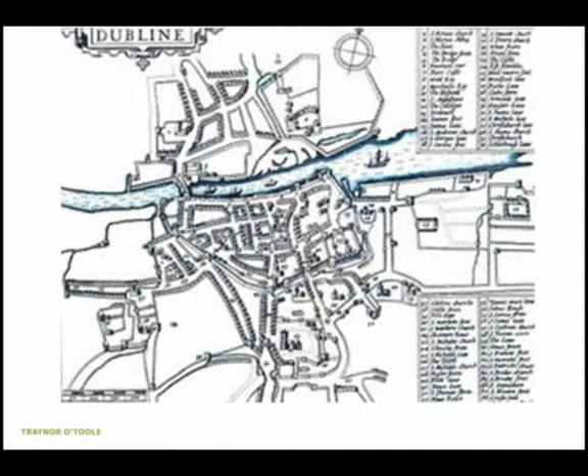For those of you who don't know Ireland so well, Dublin is on the eastern side. It has a history of about 1,000 years old. This is Dublin in the 1600s. You can see the River Liffey coming in from the west end of the town. The growth pattern of Dublin from, say, 1750 growing out up until the present day.

These are arterial road networks, our ring road, our recently built tram lines, more on the south side. And this is a proposed eastern bypass which is going to connect a port tunnel which currently connects from the airport into the centre of town. It's going to go underneath Dublin Bay and essentially connect the north and the south sides of the town.

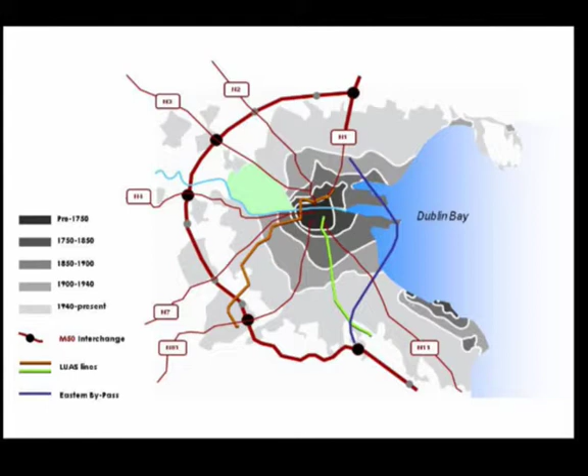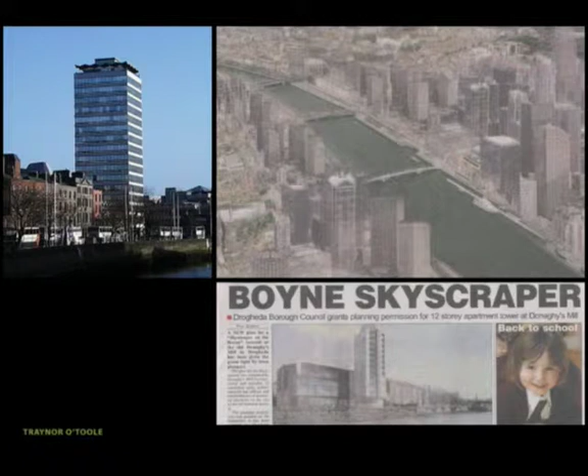Today, Dublin has a very low-rise cityscape. The historic centre of the town is defined by the River Liffey and a series of secondary canals. The building on the top left, Liberty Hall, was built in the 1960s. This is currently our tallest building in the centre of town at 17 floors high.

There is a fear of tall buildings in Dublin. We don't have a history, unlike our European counterparts, of apartment living or that kind of lifestyle in Dublin until the last 10 years.

The general perception is that Dublin should exist as a city in the low rise, and you can see the upper slide kind of captures the fear that might be imposed on the people of Dublin if tall buildings were to be allowed. The lower slide is a town 30 miles north from Dublin, and it shows the media response to a 12-storey building. So that is what we have to contend with.

Although tall buildings are seen as being a new thing, many people, especially in our working environments, including myself, have lived and worked in Hong Kong and Japan. A lot of people have returned to Ireland who've lived elsewhere in the world. So it's not really so foreign, but it's more in the popular consciousness.

We ourselves at that time, as an example of how things changed in the same area as those tenement blocks I just shown, were involved with a joint scheme with Grimshaw's on a 90-acre site in that area for 25 commercial office buildings, about 3 million square feet. That, in many ways, captures the sudden change that really happened from about 10 years ago.

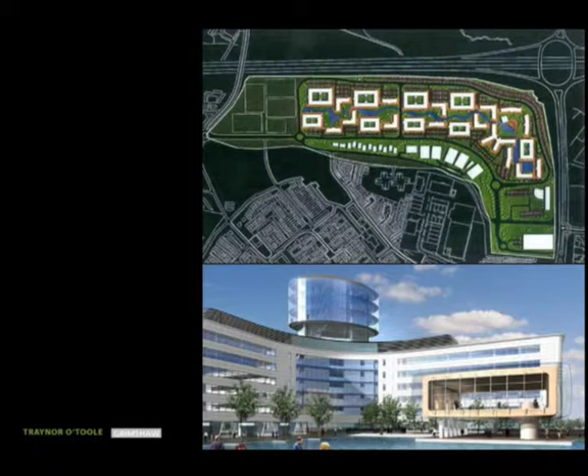Ireland emerged on a world stage. We had a very modern culture. We were confident, dynamic, expressive. As one commentator said, for the first time in history, the Irish had a chance to dream.

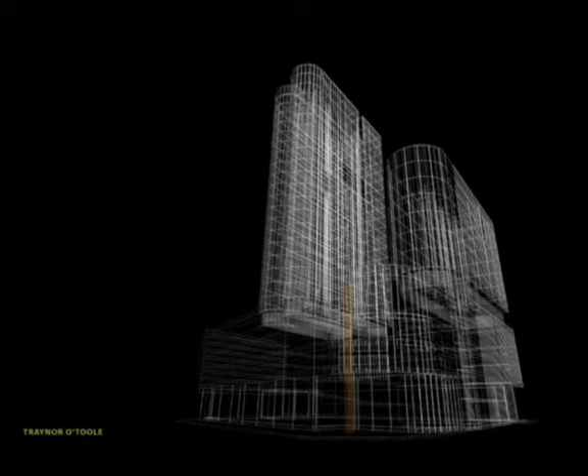In our office, together with my directors, Paddy O'Toole and Chris Ryan, who are here with me today, we have pursued tall buildings on behalf of our clients for 10 years. These are just some early examples of several schemes that we've worked on. The ability to deliver these schemes has been restricted by planning policies in Dublin.

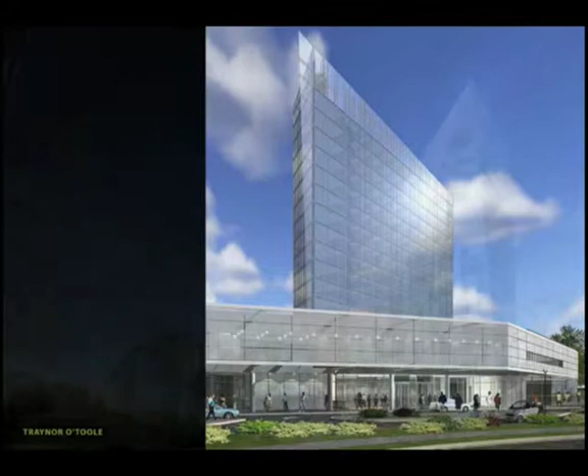The point is, why should we build tall? Well, one of the major issues we have, and possibly the biggest tangible driver, is urban sprawl.

Dublin is soon to be the size of Los Angeles, although it only has 25% of the population size. Our commuter belt has increased from 25 to 100 kilometres in the last 6 to 8 years. Commuting is 3 or 4 hours per day for many people living in the greater Dublin area.

We have an obsession with car use. Our usage is 70% greater than France, 50% more than the UK, and 30% greater than the US. We have an average mileage of 25,000 kilometres a year. Our rail network cannot keep up with the process of change and is very far behind.

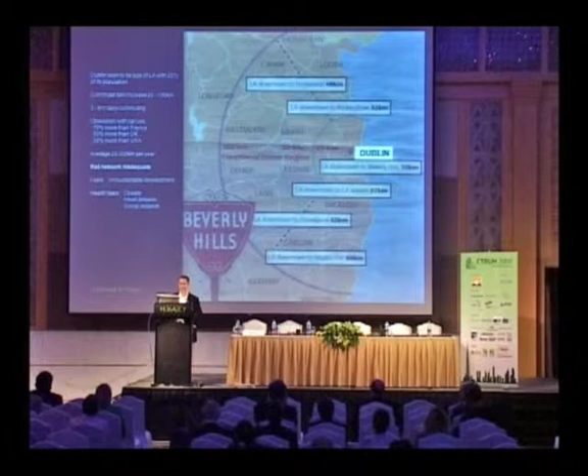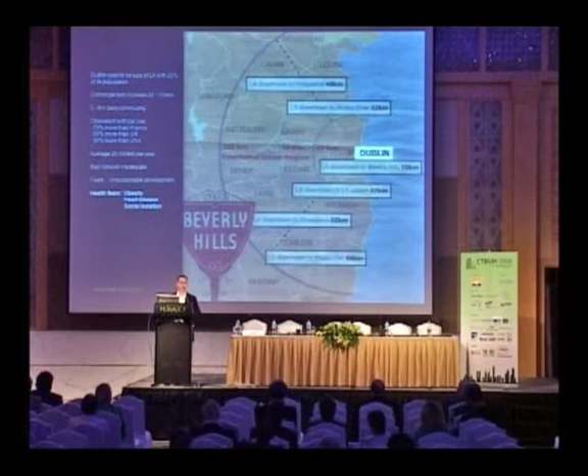Fears of unsustainable development have been realised at this time. There are also other fears which often get missed, such as obesity, heart disease, and social isolation.

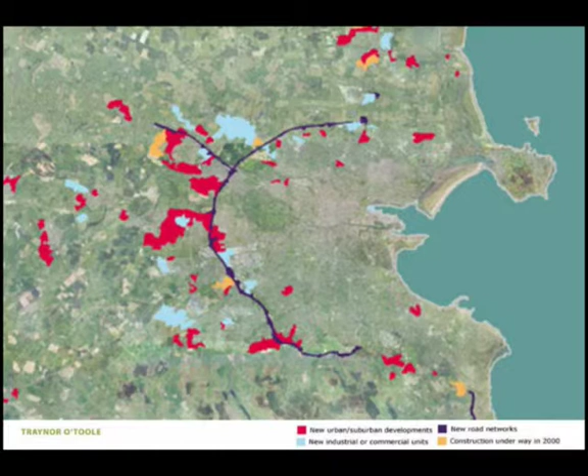So this is the purple line, the M50 road, which is a ring road which traditionally would have shown the extent of Dublin. We are now commuting far beyond this.

Commuting is a national grievance. Peak hours are very, very difficult.

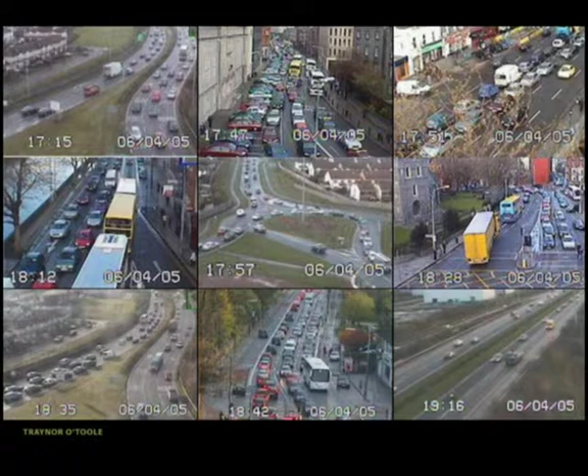We have problems with urban sprawl as well. House building is 4 times the EU average, that's up until last year. Dublin's population of 1.5 million people is due to increase to twice that by 2025.

We have an urban growth pattern that is unique within the EU, and as stated by the European Environment Agency, Dublin is now cited as an example to new Eastern European states within the EU, as a worst-case scenario for urban sprawl.

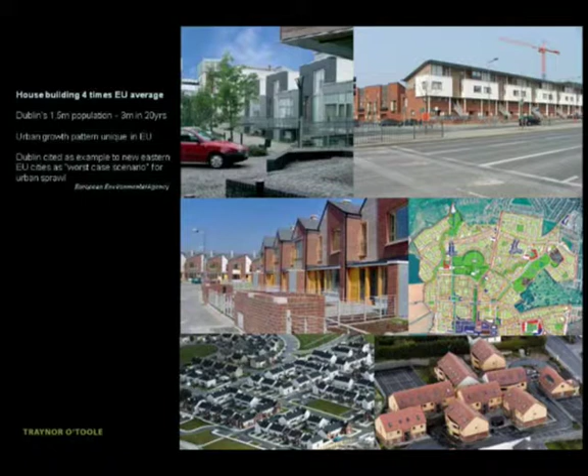But what has the planning policy been? Eight years ago, the planning department in Dublin produced a strategy for intensification and building tall.

The report identified a series of locations for singular landmark towers. These were sited on citywide viewing corridors, key focal points on the road networks, and on primary transport nodes.

Generally, heights were restricted between 9 to 15 stories in these areas, with the exception for key landmarks. Low-rise is considered to be 4 stories, mid-rise 12 stories, high-rise about 150 metres tall, and super high-rise anything above that.

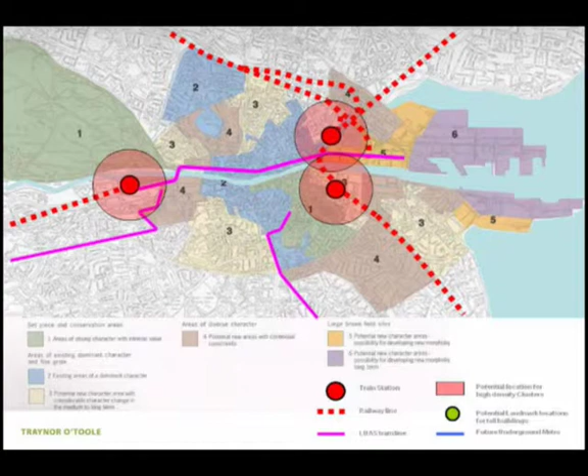Three cluster locations were identified as well: one in Heuston in the west, and two in the Docklands area, one in the north and one in the south. We know that clusters increase density, but singular landmarks don't tangibly impact on density. Singular landmarks, however, is what has been pursued rather than clusters over the last 8 years.

Just to look at some examples, and there are only a few: this is Heuston Tower, a 32-story office building on the western side of town. It's a safer option to build tall in this area than it is in the centre of town.

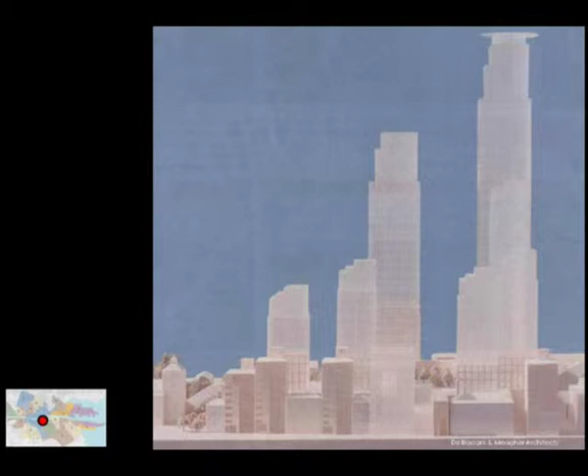This is an example of a proposal for building tall in the centre of town: a 49-story office tower as part of the digital hub, a government plan to bring a digital innovation centre into the centre of town, dubbed by the media as a mini Manhattan in Dublin. It was refused planning, as it is in a contextually sensitive area.

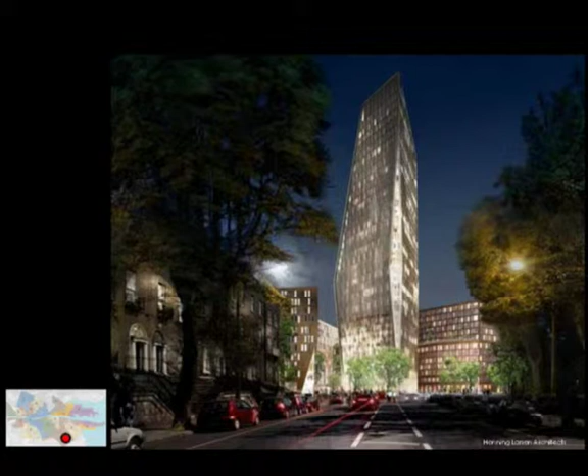Another building currently in a contextually sensitive area, as I call it, is Berkeley Court. Although this is in a low-rise area, that low-rise area is actually filled with corporate bodies and corporate office space, and it's with this in mind that this building's been proposed there.

To give you some idea of land costs, this is a 7-acre site, and the value of this land is €54 million per acre, to give you some idea of the real estate value.

The most likely and most suitable area for a tall buildings initiative, in our opinion, is the Docklands area. It's the best served area by rail networks, by the tram line, by the port tunnel, and the future eastern bypass. It also has several bridge links.

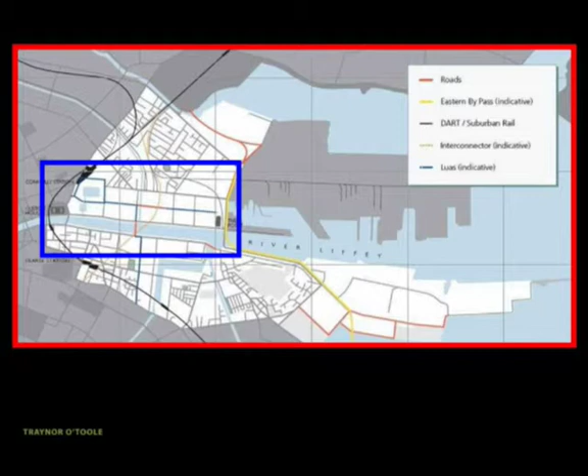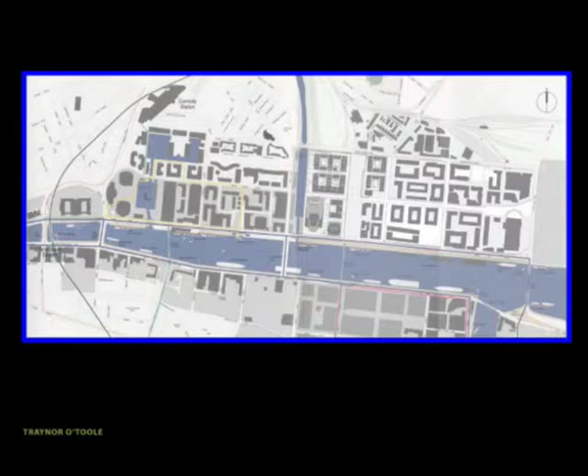Concentrating on the first phase, a lot of which has been built over the last 10 years or so, there's a lot of large sites here, brownfield sites, which can be developed. There's little existing context, which would make it an ideal location for a sustainable tall buildings initiative.

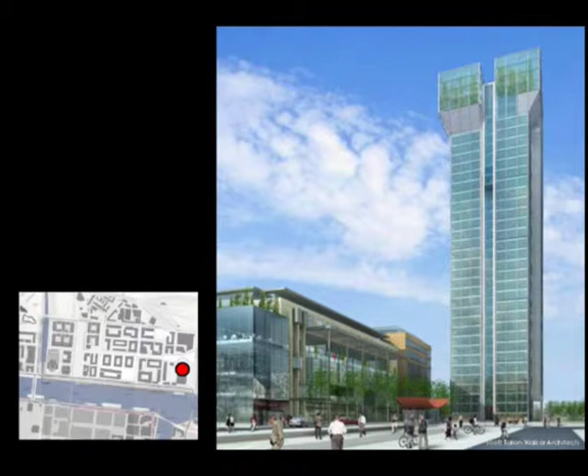This is a point tower currently under construction. It's a 32-story office tower, and it's at the mouth of the river on the north side.

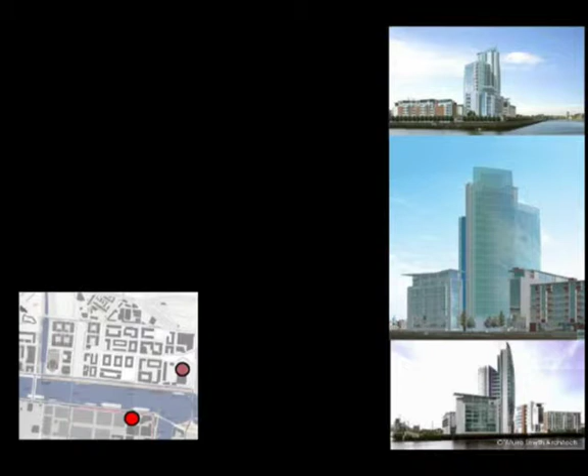On the south side, diagonally opposite to that, there was a proposal for a tall building here. However, the planning department had preferred an adjacent site right on the corner. You can probably see on the slide, right next to the red dot.

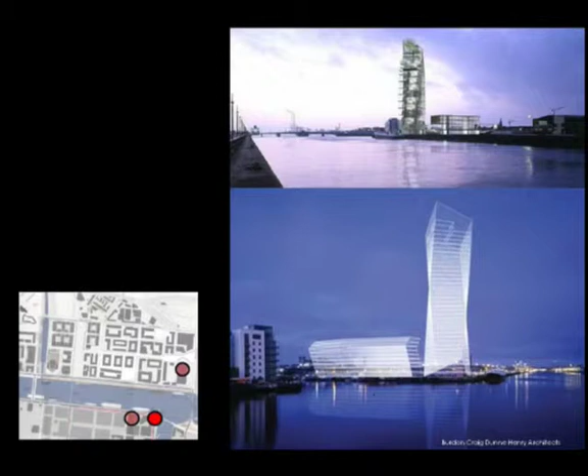This is the U2 Tower, and there was an international competition held for this. Two rounds of that competition have seen this scheme, a Norman Foster scheme, currently proposed for that site. In planning terms, this building and the one on the north side would create a gateway at the mouth of the river.

However, whereas we are very happy to see tall building proposals like this, and we applaud the architects behind them, in planning terms we feel that a policy that discourages the development of a cluster merely to preserve the iconic nature of these two towers needs to be discussed and examined in light of current environmental issues that perturb the world.

This is a scheme that we're involved in next to the U2 Tower. It's 500,000 square feet of office space. You can see the potential for a cluster in this area. However, we will be curtailed from such because we do have to preserve the icon that is next to us.

Market forces are truly driving change. There are several requirements we're involved in for single-tenant buildings of 500,000 square feet of commercial office space. The need to build tall exists.

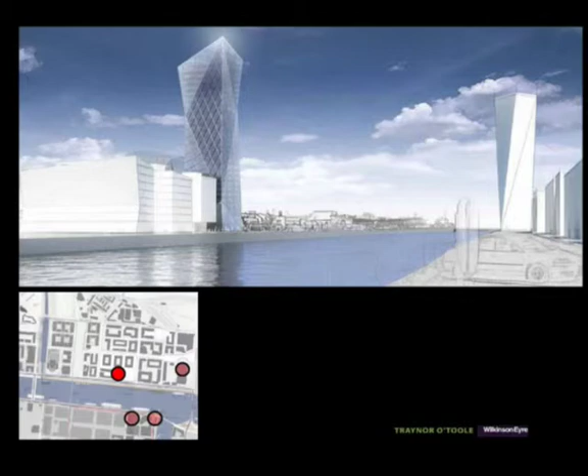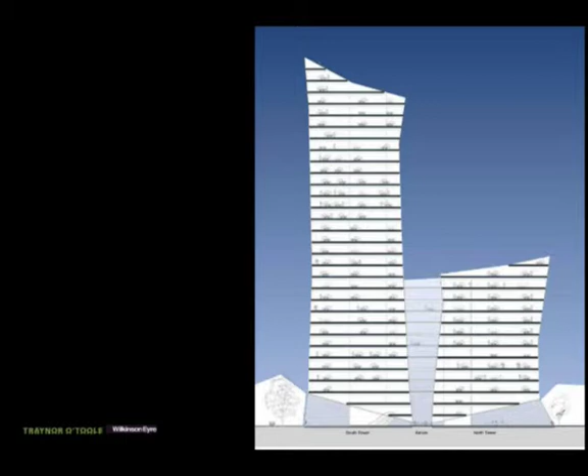In these buildings, the tenants require very high quality environmental criteria. They all demand BREEAM Excellent in terms of their building's environmental performance. We're on site with several of these buildings just now, and we have high-class facades, a lot of twin skins, geothermal boreholes, chilled beams. So we have to deliver very environmental areas.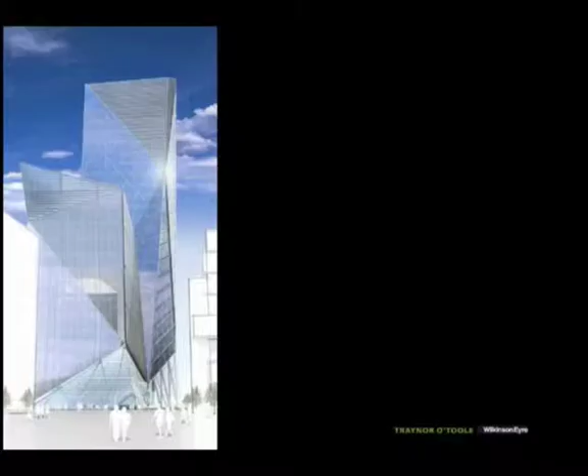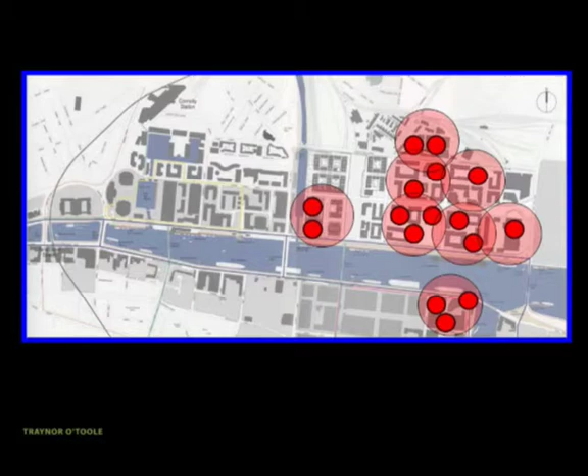The rear view of this building shows the potential for a cluster once again. We think the real potential or need for clusters, based on the market at the moment, is as shown on this slide. If the buildings here, rather than being singular landmarks, were to be grouped, we would have a cluster pattern of this kind. The potential to direct and control development of clusters exists.

Clusters are effective in reducing urban sprawl. The use of tall buildings should not be singular urban gestures, but they need to be robust, versatile, sustainable solutions. These are just some examples of buildings we're working on in this area and how we're looking at how tall buildings might be and how clusters might be formed.

We do need a methodology where such a cityscape can be enabled. Planning policy, however, is slow in comparison to market demand.

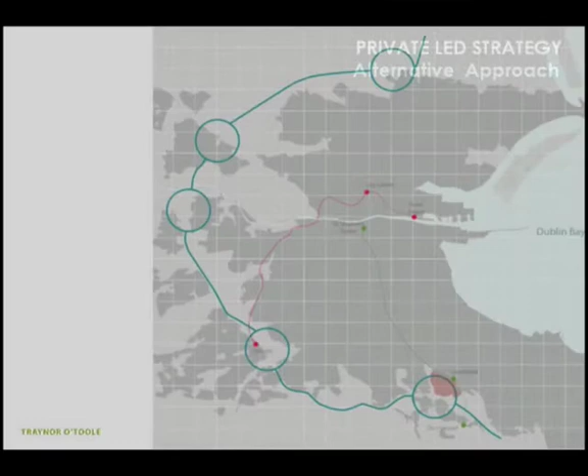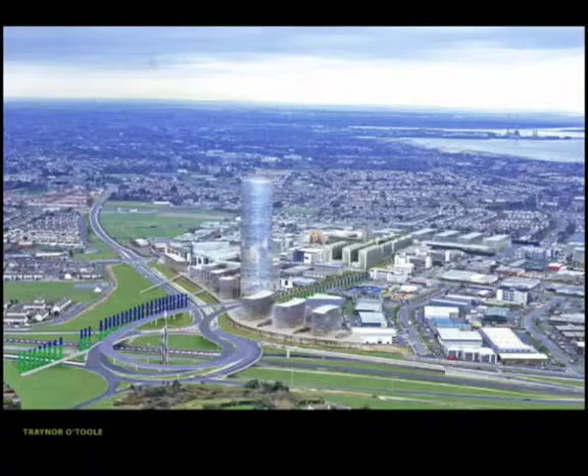I'm going to show an alternative approach where we worked on the south side of town. It's a large industrial estate, and we've worked on this scheme for over 2 years. I had proposed a 50-story building on this site. That's just some slides of the work in progress over recent years.

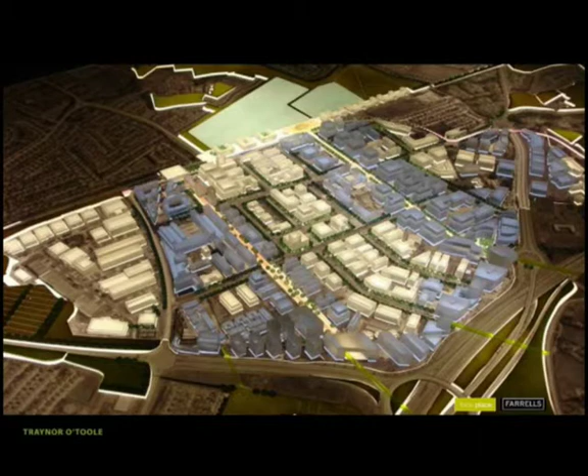On that, we did a master plan for the entire site, based on tall buildings in some of those areas. This was a joint scheme with ourselves, Think Place, and Terry Farrells. Our client is a very large landholder in this area, and essentially there's a boulevard that connects the tram line to the gateway site. We ourselves have already built over 3 million square feet in this area for this one client. These are just some of the examples.

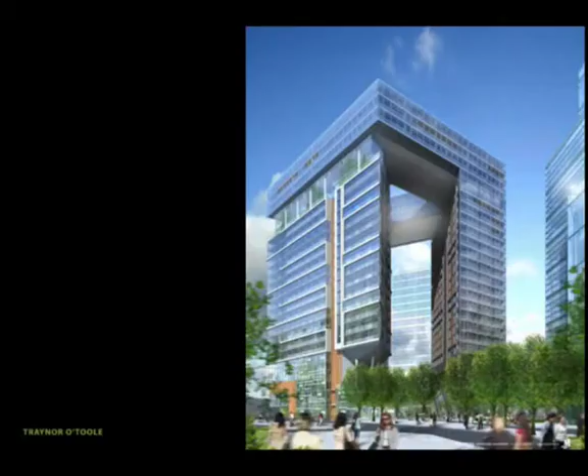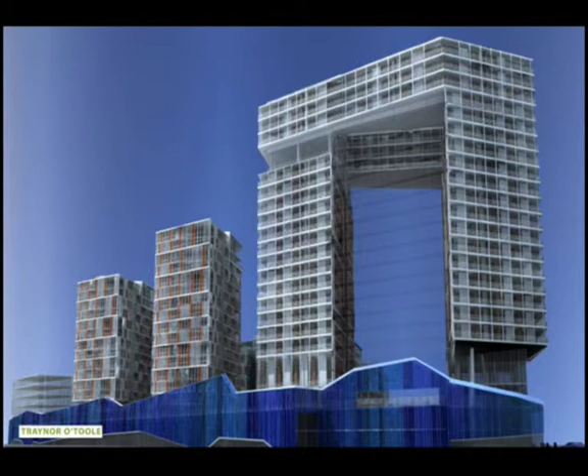We have a very good rapport with the planning department in the area, and this is the current tall building that we've proposed on that site. This is the gateway building. It is an environmental scheme which has 20% renewable energy in it, and we use various things like carpooling, electric cars, and so forth.

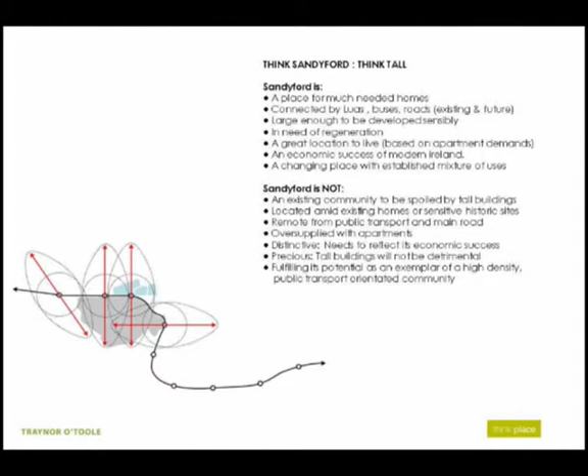In essence, what has happened is we made a tall buildings report for this area, which was effectively endorsed when the planning department carried out their own tall buildings report, in which they identified our building as one of others that should be built in this area. You can see it, the gateway building, outlined there.

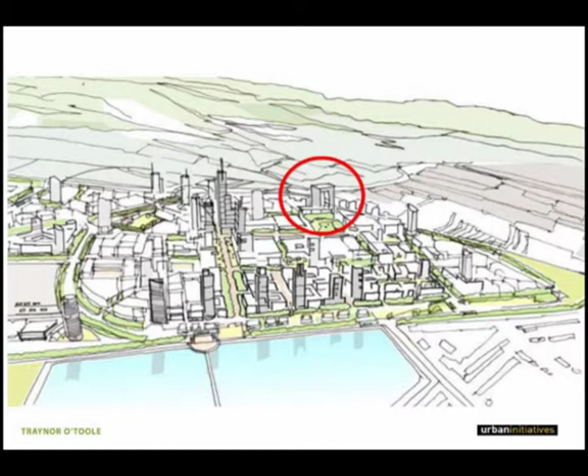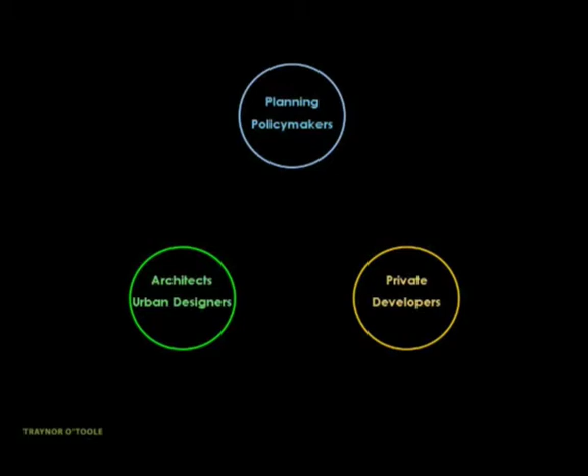The way ahead, we believe, is that we need to initiate a process of collective analysis and thinking. This is a conjecture of what Dublin might be. In its most simplistic term, there needs to be collective analysis and thinking. We have to share our knowledge and aspirations alike. It has to be collective interaction via a proactive process.

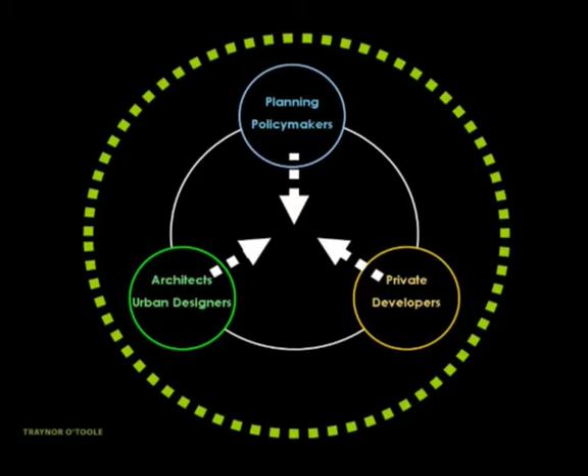At Traynor O'Toole, we advocate grouping sustainable energy processes, as per this green belt, as I describe it. Returning to our indigenous clachan, we propose grouping tall buildings and clusters within sustainable energy collectives, so we can make the most benefit out of a lot of the knowledge that we have over, for example, combined heat and power and district heating, and so forth.

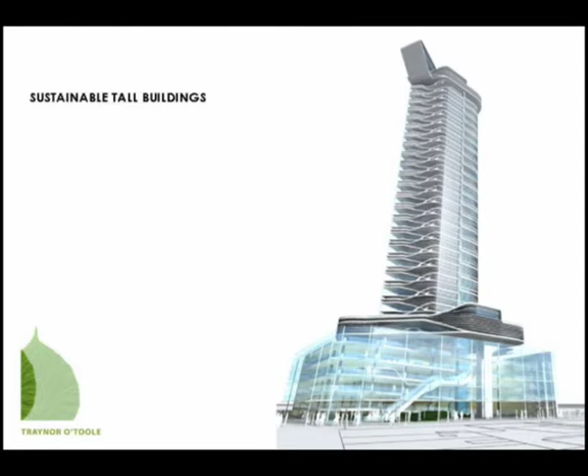Currently, we are presenting tall building proposals to all our clients within sustainable design parameters. Within our tall buildings, we strive to enable a relationship between people and the natural world. We recognise that we have a responsibility to all of the world.

Over the last 3 days, we've seen schemes from all over the world, and although in different countries, all of these schemes are linked by the environment and the responsibility we all have to sustain this world. I feel that what we're doing in Dublin, although at a different scale, is no different to Songdo or Guangzhou or even here in Dubai. I hope that we can all help each other, as after all, we all live under the one sky. Thank you.